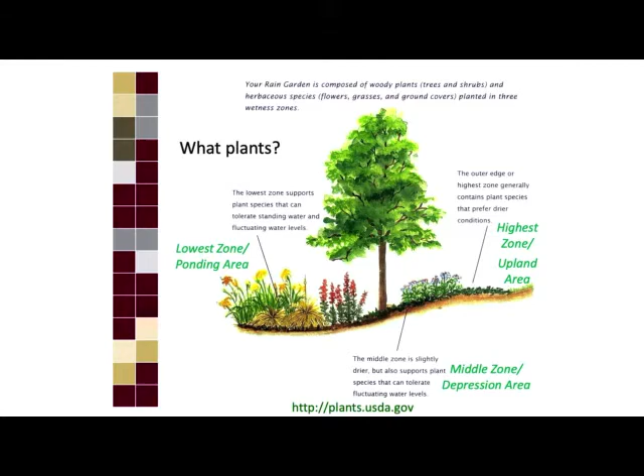So when you design your landscape, it's best to do something like shown here on the screen. We want things with the lowest water use to the high side. I know we're here in the Panhandle and it's pretty flat, but we've got lots of areas of town that do have rolling hills, sloped yards, and can utilize some of these ideas. So lowest water plants up high, maybe plant a tree somewhere in the middle of the slope, and then down toward the bottom is where your higher usage water plants would go. That way they collect any of the water that may run off and run downstream. So that's the ideal way if you can redesign your own yard.

Another thing I've noticed around town, a lot of the areas have been developed over the past many years with the concept of run off instead of run in. Look at some of the big parking lots from the big box stores. They have their parking areas, and at the end of the parking area, what do they have? Usually a berm, sometimes it has grass on it, sometimes it's got a few trees in it, but in most cases it's higher than the parking lot. So where does the water go? It runs down the gutter, down the street.

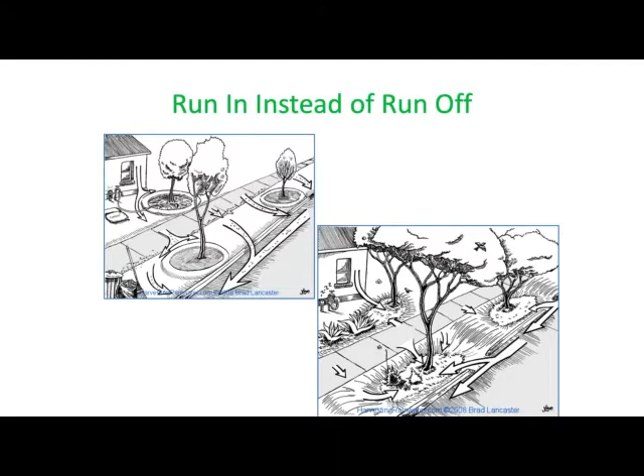Hopefully into some lake someplace, but it's running off. So I would like to see everybody think about designing things with a run-in concept instead of run-off. That way, as the water accumulates on the streets, it runs into these areas and could water the plants without any supplemental water.

Now, this obviously isn't in the Texas Panhandle either, but the same concept could apply. I see low spots in town where people have used their lawnmowers and run through the mud to mow the grass and the weeds that are in these low spots. So here would be another opportunity to convert those low spots into rain gardens and use it that way instead of letting the water run off.

I threw in a few slides here on rainwater collection. Didn't think a lot of the previous speakers were going to talk about it, but then a couple speakers ago some questions came up about rainwater collection, so this will tie in good with what they've said. I also noticed it looks like there may be some rain barrels they're going to give away at the end of the program. So here's a nice formula that I like to use.

One inch of rain on a square foot of roof is a little over half a gallon, 0.623. Now, if you remember earlier in the morning when Ben was talking about the size of this room, how big did he say it was? Almost a half an acre. Okay, you take the size of this roof and have one inch of rain, I calculated that real quick. It's over 13,000 gallons that would come off of this roof with just one inch of rain.

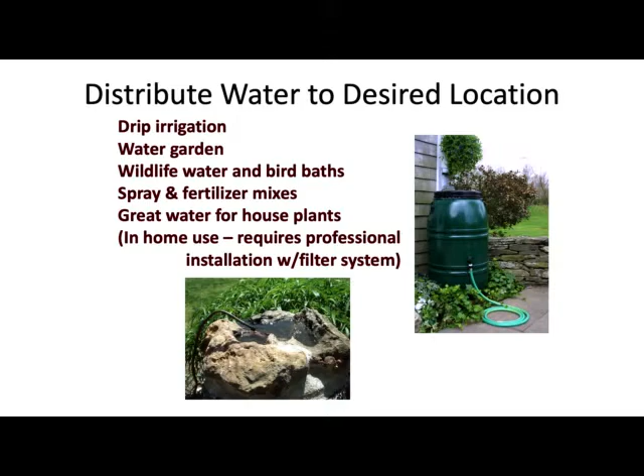One note here: in this area we really don't have enough rain to support your whole house, so I don't ever recommend hooking it into your house. Some people down in the hill country will do that, and they can use the water from their roof to supply water for their whole household. But if you do that, there's special considerations that have to be made, and it needs to be done by a professional.

There's just a picture of one of the options. It depends on how much money you want to spend on a system and how big you want to go. You can get up to 3,000, 4,000 gallon tanks. Typically we want to see them either a dark color, black or brown - that keeps the UV rays from the sun from causing algae to grow. Also, you need to have them screened and covered to be sure you don't promote mosquito growth and things like that.

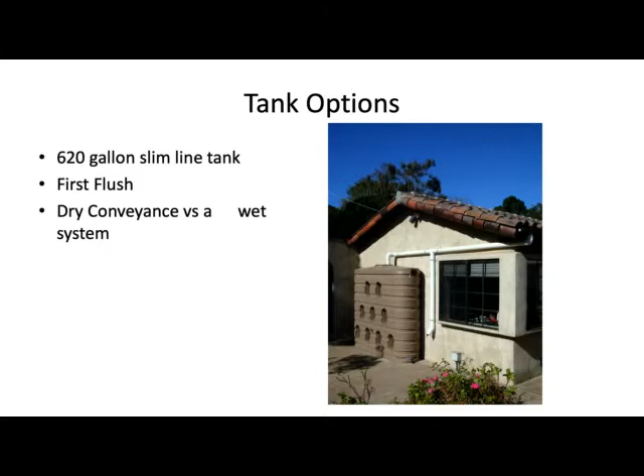So again, this is kind of a typical setup. You can see where the water is coming off the roof and it's collected into a pipe that sends it to the tank. If you notice the pipe coming down the wall, that's called a first flush system. It's designed to take any dirt and debris off the roof and let it fill that pipe rather than go into the water tank first. You can either take the cap off the bottom to flush it completely, or a lot of them have just a small hole to continually drop a little bit out to keep it flushed. So again, almost anybody can collect rainwater, almost.

So a couple things as far as water conservation and water efficiency. I like to show this just to make sure everybody's clear on what conservation is. Conservation is a reduction in water loss, use, or waste, and it's actually a behavioral change.

So what that means is, instead of taking a 10-minute shower, you take a 5-minute shower. Last time we met here, I got a little sand dial thing that you could flip over and it would run for 5 minutes. You could flip it the other way the next time you took a shower, so you could tell for sure how long you were in the shower. I still carry that around in my bag of tricks, but that's conservation when you don't use water. Another example is turning the faucet off when you're brushing your teeth, or not letting the water run when you're washing the car. Use a bucket and soap and a brush, and then rinse it only with water.

So those are conservation measures. Now, efficiency is where you want to get the most out of the water that you do use. So in the example of your shower, I saw one of the booths out here with some new shower heads that reduced the flow from maybe 3 gallons a minute to 1 gallon a minute. So that's going to make it seem like you're getting the same shower but only using a third of the water.

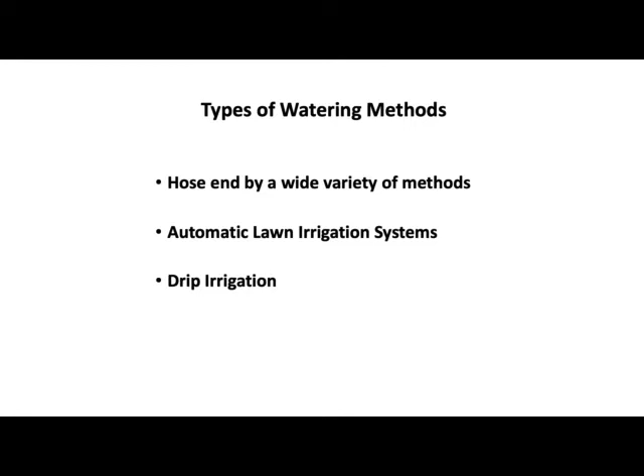Here's a few things I like to talk about when we're looking at water efficiency. One of the previous speakers mentioned St. Augustine grass. Fortunately, we don't have any St. Augustine in this area, but we have plenty of bluegrass, and bluegrass takes lots of water. Now, some people prefer Bermuda because it takes less water, but as a master gardener, when I've got a Bermuda yard and flower beds right next to it, that sometimes creates a problem. Plus, it stays dry most of the spring until midsummer, when it finally starts to green up.

So a lot of people are still set on having a nice green yard, and so they've got either bluegrass or hopefully have switched over to fescue. But when it comes to watering efficiency, you really need to decide at the beginning of the year how much water you want to put on your yard.

A lot of that depends on how you train your yard. If you train your yard that it can survive on two times a week during the summer months, then that's all you'll have to water. If you spoil it early in the spring and turn your sprinklers on every day so it grows thick, tall, and green, then to maintain that throughout the summer you're going to have to continue to water, even water more. So decide beforehand if you want the greenest yard in the neighborhood, or a nice looking yard that's healthy and will still maintain its green color with less water.

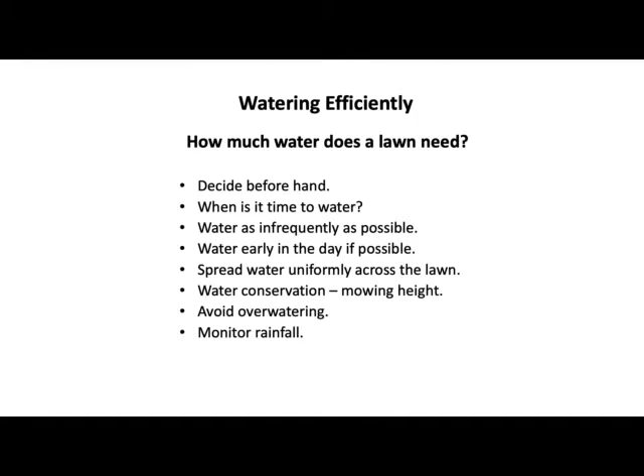And of course, the last thing is monitor your rainfall, and we'll talk about some things in a minute to help you with that. Typically, a turf yard only needs about three-quarters of an inch to an inch of water per week to maintain its green color. Again, it may not be the greenest on the block, but with good practices it could maintain a good color and survive on about an inch of water per week.

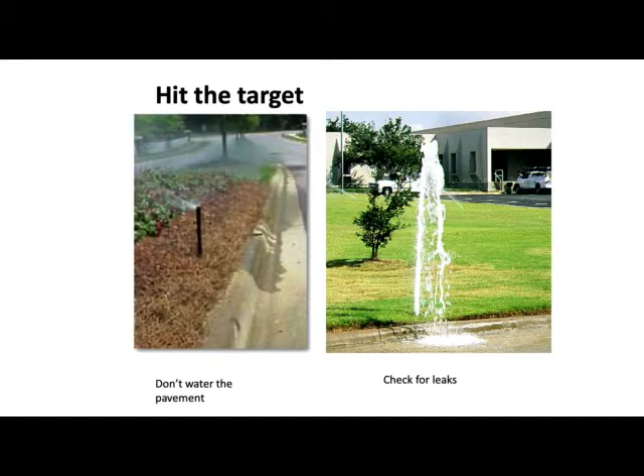Another thing, of course, with the wind blowing, sometimes you'll see this, but these are some new rotator heads that put out small streams instead of sprays. Typically you'll have better coverage here without as much spray onto the sidewalks. So in this case, they were either misadjusted or somebody ran it longer than what it needed to.

Another thing I always like to point out is that when you look at your yard or your plants, a lot of people think the first thing they need to do is put more water on. If you've got a yellow plant, need to turn the water on. So they set the sprinkler to run more often. A lot of times the yellowing isn't from lack of water, but from lack of nutrients or disease, possibly insects. A lot of things can cause plants to turn yellow. So make sure you analyze your plants before you just start adding water.

As a matter of fact, too much water will make a plant turn just as yellow as lack of water. Usually lack of water causes the leaves to curl, they roll up and start to turn a little bit of a color, but they usually don't turn yellow. And I always say that if you've got a plant that's underwatered, it's a whole lot easier to revive than if it's overwatered. A plant that's underwatered can look all shriveled up one day, you dump a little water on it, and the next day it just pops up and looks a whole lot better.

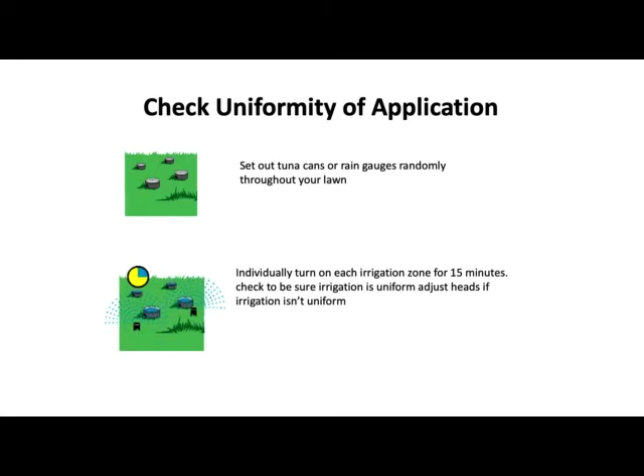Or if nothing else, get your garden hose out and water those few dry spots instead of watering the whole yard. Typically, dry spots are along your driveway or sidewalk because heat from the sun compounds the problem. Also, your sprinklers along a sidewalk or driveway may only be covered by 2 heads, versus 3 or 4 heads covering a zone out in the middle. So you've got two problems along your driveway: less coverage and extra water requirements because of the heat.

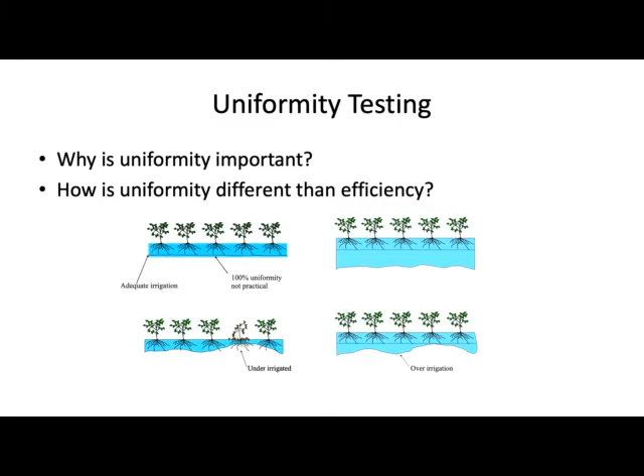Still, for a yard, you're only looking at maybe $200 to convert one zone over and have a more efficient system. These rotator heads only put out about a third of the water, so you have to run them longer, but they're so much more efficient. Since they put out a third of the water, you only have to run them about twice as long, so you're still saving a third of your water.

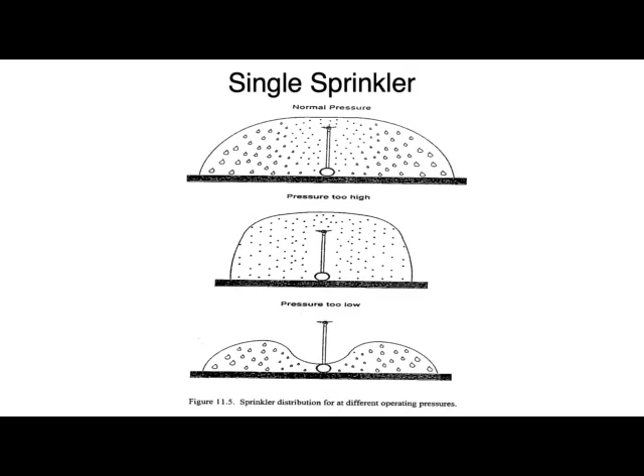It's especially bad when, say, I put a dog run off the side of my house and had to cap off 4 heads along the side. Now you've only got 3 heads in the back, and you've got this high pressure issue. So keep that in mind as you're changing your yard over from grass to beds - make sure you don't overdo it and change the design of the system.

Going into drip real quick.

This is kind of a typical layout of a drip system. A lot of people haven't gone to drip yet. There are a few problems putting it under grass. First of all, you can't aerate - it wouldn't do very good on your drip, even though you've got it buried 2 to 3 inches down, but it causes aeration problems.

Some other problems with it - if you've got a problem in a zone somewhere, you may not know it until the plant actually dies, because you can't see when emitters are plugged or there's a problem with the system. But drip is still the way to go.

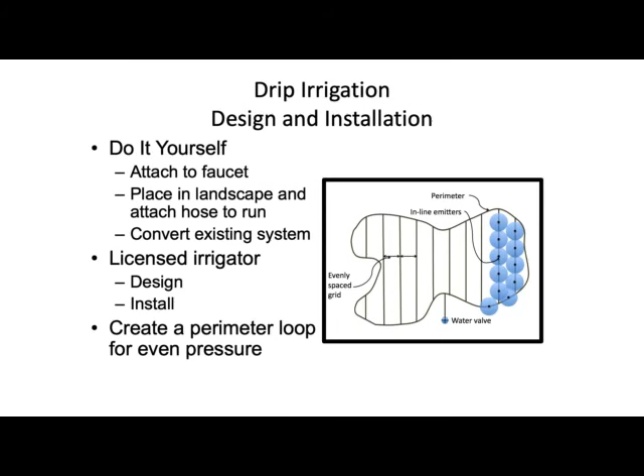If you're doing a bed, this is a typical drip system - you do an outline perimeter with a drip line in between.

A lot of homeowners like to hook up their beds around the house to drip systems. So this is a typical system where you hook onto a hose bib and run a system out on a drip line, and from there you can run all kinds of emitters to do individual plants.

Emitters come in sizes from less than half a gallon an hour up to 10 to 15 gallons per hour. So if you've got different size plants and different water requirements, you can change those emitters as you run that string from here to the other end of your house.

One thing to be sure of - if your house doesn't already have a backflow preventer on the faucet, make sure you put one on it, to ensure that if we have a water loss or pressure loss in the city system, we don't contaminate the system.

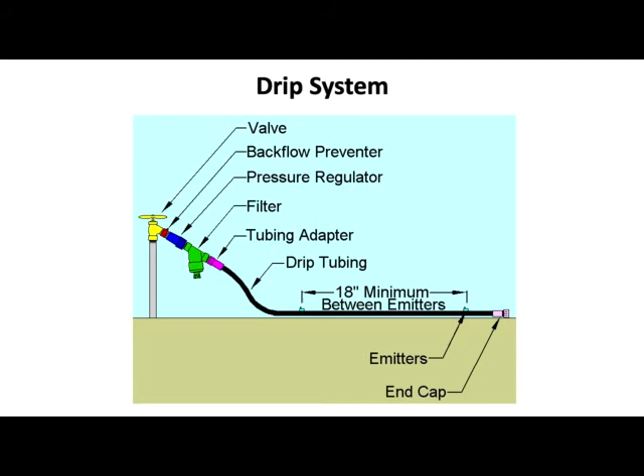One thing I'd recommend if you're going to put a system on like that: spend a few dollars on a timer. I don't know how many times I see people turn these things on and then 4 hours later realize they forgot to turn it off. This way you can set it to run 30 minutes, 40 minutes, or an hour, and you know it's going to go off.

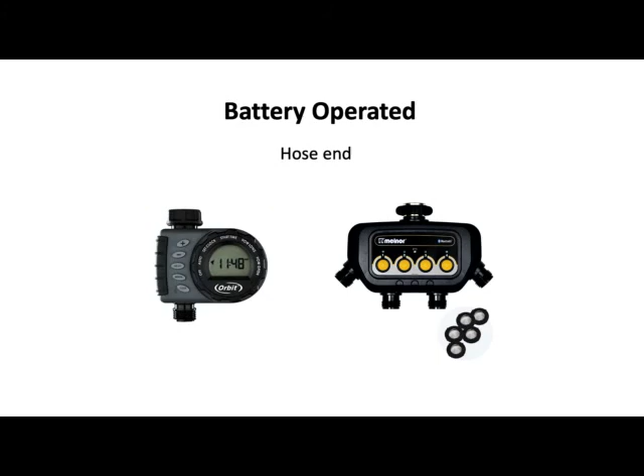Again, there's all kinds of emitters. One thing I didn't have on there is a little piece of hose emitter like this. I like this for watering pots. Hook this into that drip line you can run down the side of your house, and make a loop like that for a small pot. It puts out a half a gallon per emitter, and there's about 4 emitters in this one, so you're going to get 2 gallons an hour out of that. If you put the same type of setup in a bigger pot, it's just a bigger loop - it may have 8 emitters on it - but you can size this exactly to your pots' needs and water them with just a few minutes, turning on a timer and letting it run for 8 or 10 minutes.

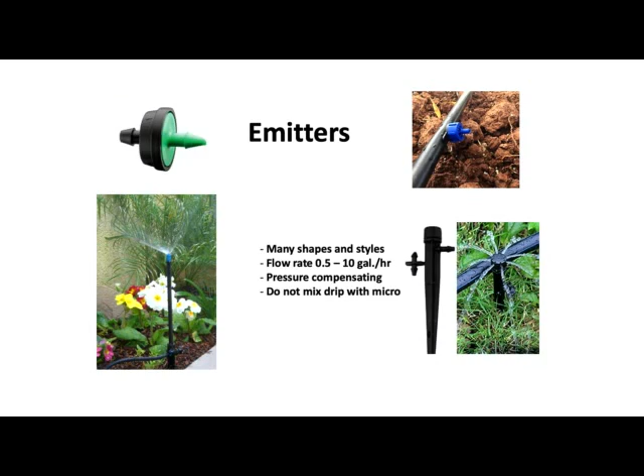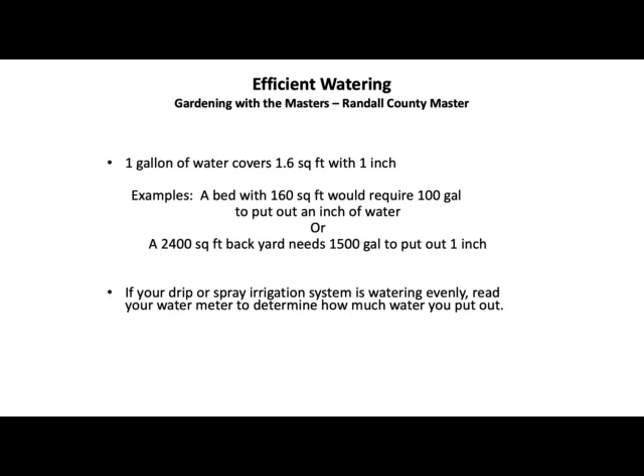These smart meters, you may not even have to go to the alley and flip the lid up - you may be able to check it on your app. So I'm looking forward to that. Again, a typical backyard of 2,400 square feet only needs 1,500 gallons, so keep that in mind.

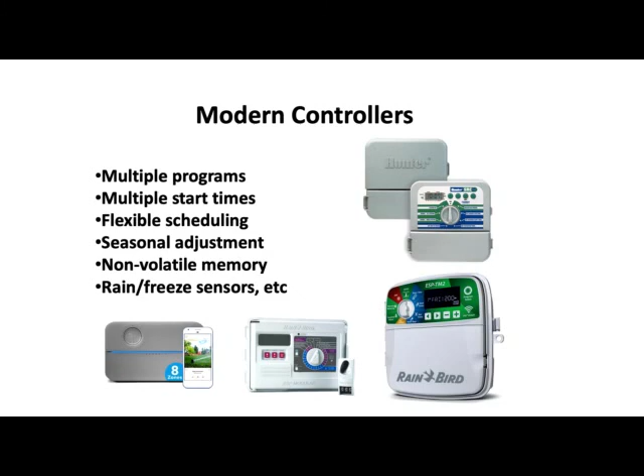The last thing I'd like to talk about is rain freeze sensors. If you haven't been by the city's booth, they've got 2 different brochures back there, and both are really excellent. One is on the rain freeze sensor program - take a look at that. There's a rebate if you have one installed on a system that was put in before 2009, you're eligible for a rebate. Technically, any system put in after 2009 should already have it on there. If it doesn't, it would be well worth your money to do it, because for just a few dollars - usually around $100 - you can have one put on, and with the price of water as it is, it wouldn't take many times shutting off during a rain before you save the money it cost.

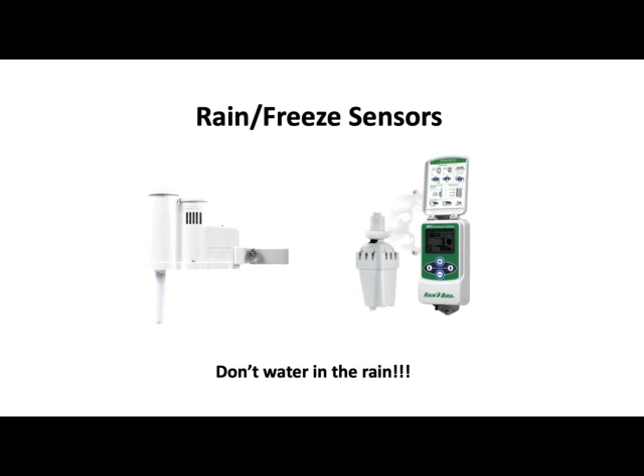I like to end with this quote from Benjamin Franklin: when the well runs dry, we will know the worth of water. Thank you. Any questions?